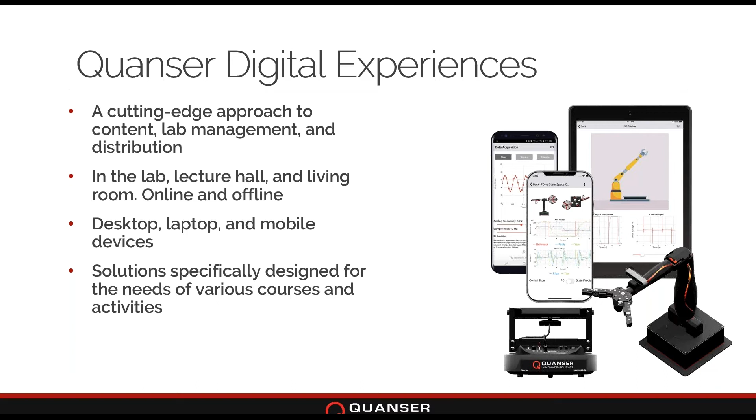The first real incarnation of this was when we created Experience Controls, our digital textbook, at the end of last year. Over the one full academic year since then, we saw over 5,500 downloads with 450 instructor resource downloads. You can see here from some of the comments we got back from students primarily, there really was an appetite - this showed that students were engaged and interested in this type of innovative platform.

For being able to connect with traditional resources that would typically be provided in something like a paperback textbook, but being able to really engage, understand, and interact with these platforms and experiences. There was an appetite there, and this showed us that kind of experience would be of great value in this context - to take not only the classrooms offline, but also to augment traditional classrooms.

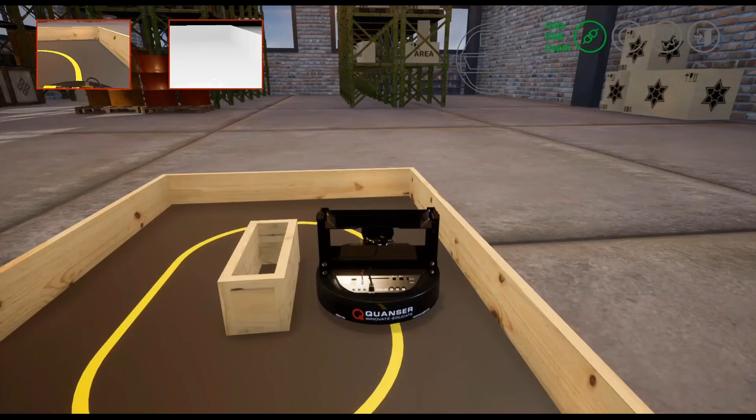At the same time, we did a lot of work over the last few months with one of our partners here in Canada to provide solutions like this for changing how they deliver their first year engineering experiences, where students don't just come into first year and get a basic experience of learning electronics and mathematics, but also really engage and understand how engineering comes together at a system level.

So you can see here, we have one of our ground robots moving through a virtual environment. What this demonstrates is, for students coming into first year, the excitement of engineering, how it can be applied in different ways, how they can take on different challenges, and how different aspects of what they learn, especially in first and second year, can be applied to complex challenges. We were able to provide a virtual environment to give them that application context, which is really motivational and essential for engaging incoming students, showing how engineering comes alive in this kind of warehouse context, and making it flexible and adaptable for different challenges.

But as you can see with those two examples, they're sort of single circles of that Venn diagram, where we're either doing digital content or we're doing the virtual experiences. What we wanted to do was bring all of those together into a package to make it that unparalleled platform, that learning experience and platform that would be flexible enough to address a number of different courses and different elements of how people want to teach their students and give them these types of experiences.

So what we did was create interactive labs, which I talked about a couple of months ago for the first time when we introduced our free trial. I hope some of you had an experience with that free trial over the last couple of months. But what we wanted to do was bring all of those circles together into the only hardware-inspired way to bring these high-fidelity lab experiences to students off campus.

And that hardware-inspired approach is really essential to what we did, again bringing in all of those circles of that Venn diagram to really focus it on our hardware experiences, which we've been doing for over 30 years. We fundamentally believe that hardware experience is essential, and that giving students experiences based around hardware, based around how physical systems work in the real world, is an essential part of understanding how engineering comes together, whether it be in controls, robotics, or other applications of engineering education.

At the same time, we wanted to give them, as close as possible, the experience they would expect on campus, and also one that was a little bit more rich, interesting and engaging and enlightening than it would have been even with our traditional experiences.

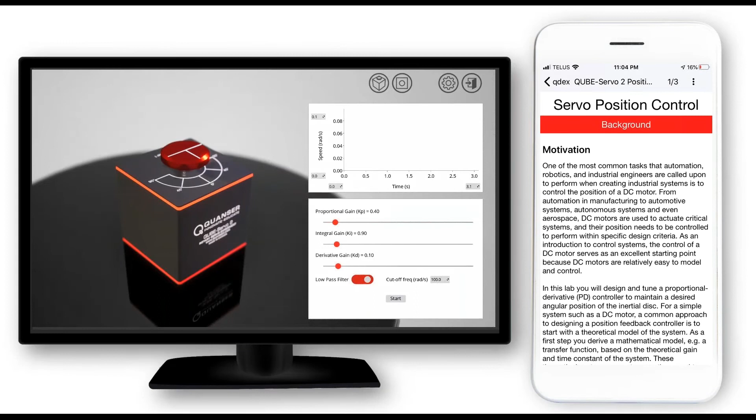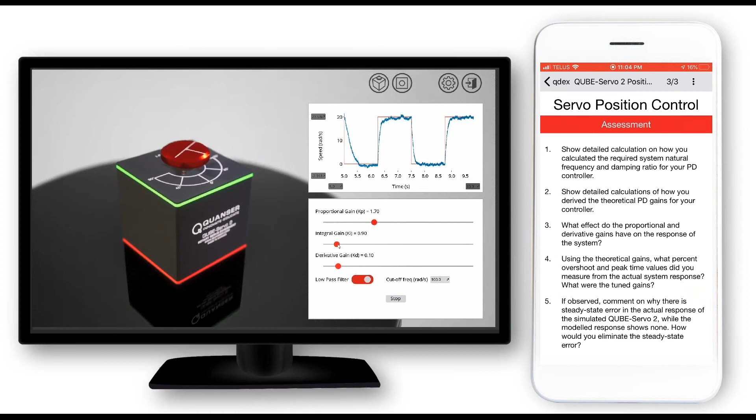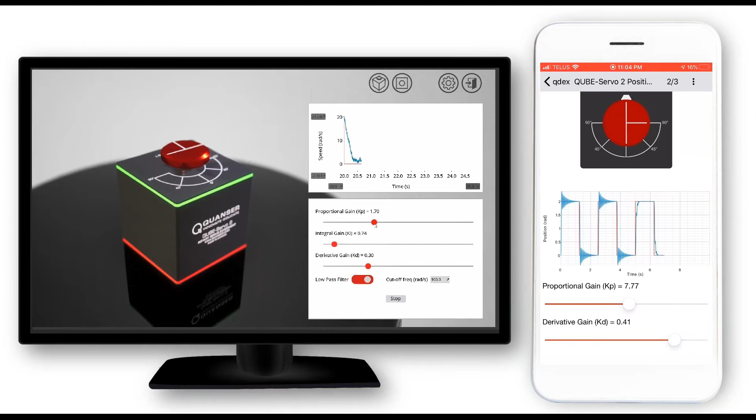That said, just because it's simple doesn't mean it has any less interactivity and engagement than we'd expect. The platform, as you can see on the left on desktop and on the right on mobile, is a very rich experience where students can interact with our plants exactly as they would the real systems. They can take measurements, and coming soon, download data sets to analyze in different tool sets. On mobile, coming soon, they'll be able to do assessment questions and submit them through email or Google Drive. Across all platforms, the experience is the same - going through the curriculum, answering questions, analyzing and tuning systems, and understanding how these hardware systems come together. It's as accessible and easy to use as possible.

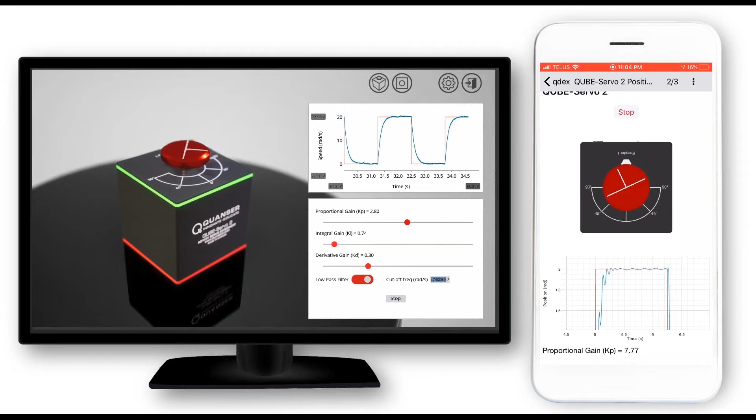Even though it's simple, accessible, and easy to use, we have a full complement of curriculum modules created specifically for control systems on this platform - and this isn't even all of them, I'll show you more in a second. Over 20, altogether over 30 lab hours of activities for students. These are custom designed for this platform - very close to, but not exactly the same experiences students would expect with our traditional hardware.

These are fine-tuned to really highlight and emphasize that laboratory experience - that interactivity with hardware - to understand what hardware brings to the table, and how control systems are affected by things like noise, stability, or different dynamics, or how creating and applying a control system might need further tuning, modification, or introduction of things like integrals or filtering to function the way you expect. That's why we tuned these experiences this way.

At the same time, we also introduced more forward-looking applications for things like aerospace, where students could get into nonlinear control or optimal control systems applicable to more complex control problems. With that comes interesting insight into how control systems work in different ways in different places. But all of that is very simple to use, interactive and engaging for students - whether on the bus, in their living room, on campus, or in a lecture - they can see these experiences and really use them to understand how these work.

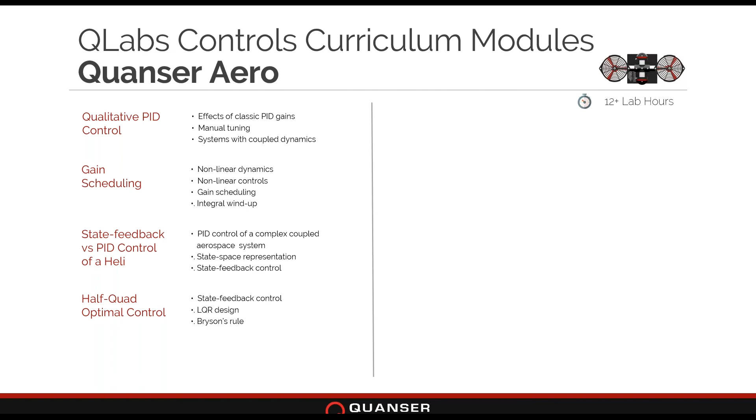So with that, we really saw this virtualized experience, the one I showed you just now and the one I'll show you in a second, as being the most effective way to deliver these solutions right now, and also the most effective way to complement on-campus solutions.

You can see here the types of packages we've created for QLabs controls. The first is an introductory package, a good-better-best set of solutions. This one deals with classic controls topics, essentially what you'd be able to do on a typical servo motor, to understand the basics of control systems and how they're created, designed, modeled, tuned, and implemented. It includes 7 curriculum modules covering the breadth of introductory controls courses, with over 12 hours of lab exercises.

As with all of our subscriptions, that can be provided as a 12-month package to students, in this case up to 150 seats, and the number of seats available grows as you move through the packages. All of them come with instructor resources and a statistics and analytics section where you can see how students are using the platform, understand how they're doing, and check in on how effectively they're moving towards the outcomes your syllabus wants them to achieve.

Moving to the second package, QLabs Controls, we add in not just the pendulum for the servo system but also the aerospace platform, bringing the total up to over 15 curriculum modules with 30 lab hours. That also introduces more seats as well as access to new curriculum modules.

I say over 30 lab hours with over 15 curriculum modules because we expect this collection to grow. We have at least 4 or 5 curriculum modules on the books that we'd like to create, but we didn't quite get them finished for our release next week. Those will hopefully be coming in the next few months.

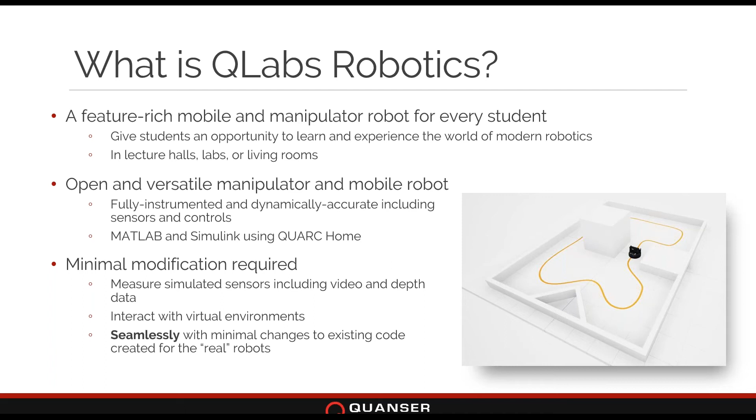And that kind of process, how that works, looks something like this, where the first step would be to install Quanser Interactive Labs for Windows. Unfortunately, this is only available for Windows because of all of the requirements we have for being able to provide this solution and have it behave reliably in real time and give the right sensor measurements and have the whole chain between your code and the virtual system work effectively. So the first step would be installing that particular system.

If you have MATLAB Simulink installed, then it'll go to the next step of installing QUARC Home, which is our QUARC version for this particular platform that speaks directly to these virtual systems. What that does is allow you, on this second step, to open any of your code, add new code, existing platforms that we provided, existing solutions that you've created, and update that ever so slightly in step three so it can talk to the virtual system just by adding an IP address that points at your local system where the virtual lab lives, as you can see there.

As soon as you open the module in Quanser Interactive Labs, it seamlessly spawns a dynamic model that runs in real time in the background, ensuring all the dynamics of the system are done effectively and the interactivity and sensor signals are passed back and forth properly.

Then you just run your code in normal mode, which if you know how MATLAB Simulink works is also new for us. There's no need to compile, download, or run external mode. You just press play and it connects and runs exactly as the real hardware would. But finally in step 6, nothing beats the real hardware experience, so any algorithms you create for our virtual systems should be directly portable to the actual hardware.

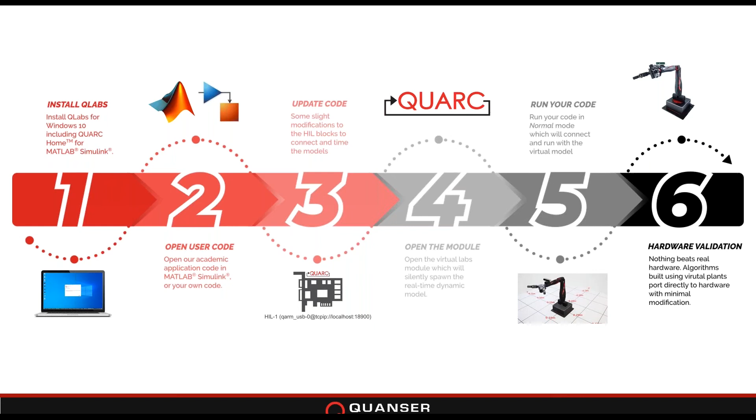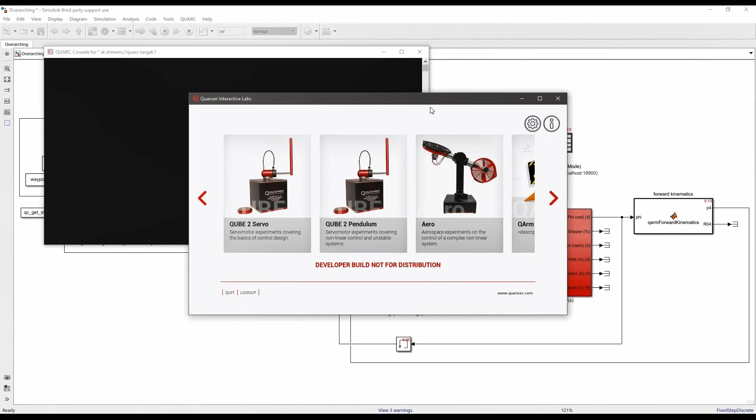This is a bit like what this whole process looks like. This is one of my colleagues who has the curriculum applications for the Quanser ARM in the background. He's gone into Quanser Interactive Labs, in this case one of our beta versions, and as you can see from the console, it immediately spawned that real-time dynamic model.

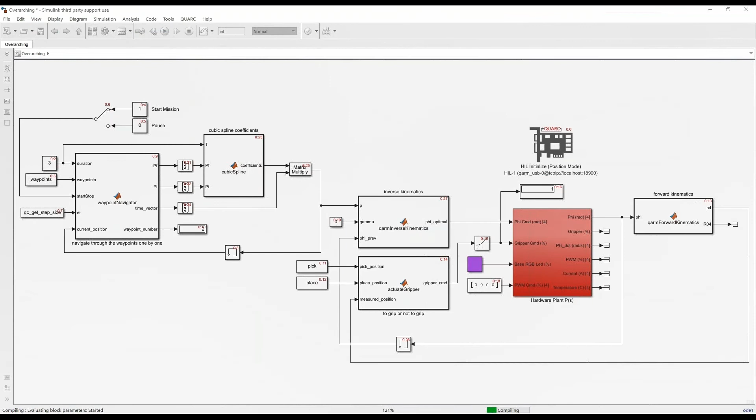He's just going to go ahead and run his code in normal mode. Again, this is just the off-the-shelf code designed for the actual physical machine, and the virtual machine, exactly as a physical machine would, starts to behave exactly the same way.

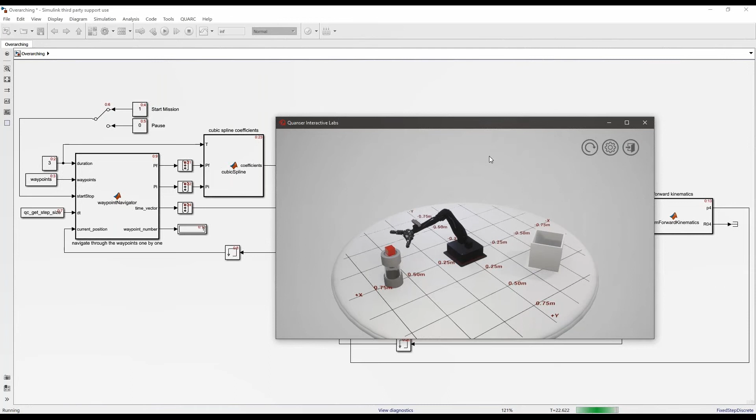It's doing a pick and place task in this case, but as you can see, he's just commanding the virtual arm the same way he would command the actual arm, and everything else is taken care of—making sure all the dynamics work properly, making sure all the controllers work properly, unless he wants to create his own controllers.

And as you can see with the Quanser arm, things like the additional sensors we've included with the Intel RealSense camera work effectively as well. You can stream video and depth data back and forth to start introducing exciting concepts like visual servoing, which I'll talk about when I get to the curriculum.

I just want to pause for a second to talk more about the Quanser ARM, the QArm, because this is an unreleased hardware product. Strangely enough, with the new world order, it will be coming after our virtual representation of this product, probably later this fall.

With the QArm, we created a four-DOF manipulator with a two-stage tendon-based gripper. We really tried to create a platform designed specifically not just for modern robotics, machine learning, and emerging aspects of manipulator use, but also specifically for modern approaches to teaching robotics—whether studio-based learning, project-based learning, or capstones—so students can really interact with and understand how manipulators work.

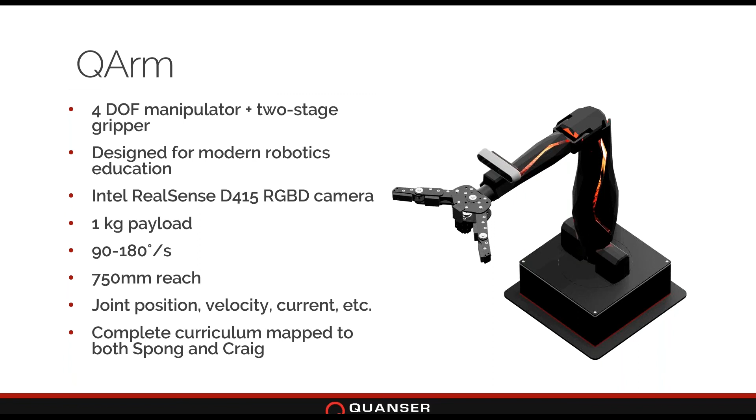At the same time, it has all the capabilities you'd need from a manipulator system—the payload, the velocities, all the sensor signals from the different joints, a really nice effective workspace—plus our full Quanser curriculum mapped to the traditional textbooks of Spong and Craig, providing a fantastic solution for academic robotic systems.

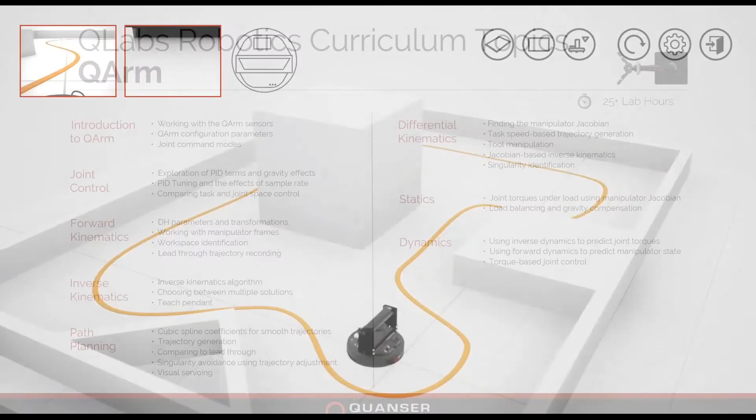These are all provided not only for the real system but also for the virtual system, so students can really map and work with their own manipulator. This is a full package of over 25 lab hours for the manipulator system. We also introduce the ground robot as well, to truly complete that full solution for robotics courses.

Here you can see the robot on the top left. We're also streaming video from the Kinect sensor, both the typical RGB video and the depth sensor measurements. The bump sensors in the front of the robot are functional, so you can see it running into walls, kind of like your traditional robotic vacuum would work.

There are different camera views. You can augment these experiences to give students something unlike any they would have traditionally, introducing capabilities or augmented aspects of this experience that might not be possible to experience in the real world.

For the QBot 2e itself, if you're not familiar with it, it's basically a versatile, open architecture ground robot. It's really a blank canvas for creating whatever algorithm students might want to work with, on a platform that's robust and versatile, with an RGBD vision system for more advanced mapping and localization applications, plus a wide complementary range of sensors onboard, including bump sensors, wheel drop and cliff sensors, gyroscopes, and other sensors included in the platform.

Out of the box, on the first release of this platform, I believe we're supporting the gyroscope and the bump sensor, but more will be coming down the road as well.

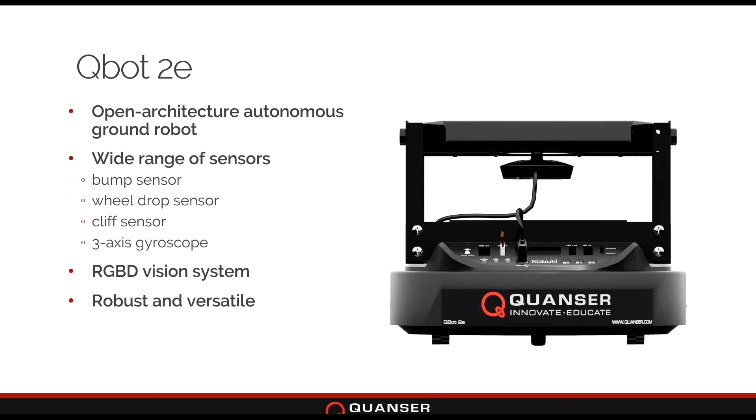We start with an introduction to the platform and to mobile robotics. We let students play with the system to really get excited by it and understand motivationally how this type of platform comes together. Then we move into things like kinematics, including odometric localization and aspects of mapping.

Using a number of different approaches to mapping and computer vision, not just understanding data coming from a camera, but also what you do with that information, things like line following. Then finally getting into path planning, different approaches to how you would create and navigate an environment.

So we really go start to finish through the experience of a mobile robot: where the robot is, what happens when it moves, what it needs to do to get to its destination, and how it reaches that destination by avoiding obstacles and things like that. The full system of how a mobile robot functions is completely covered with this curriculum.

And again, this is the same curriculum on the physical system as we're providing for the virtual system.

So for all of that, for the arm, for the ground robot, for the full experience, we have a single package now. We're hoping to provide additional packages later this year to round out the full complement of solutions for different situations you might have, depending on your course, your outcomes, and your needs.